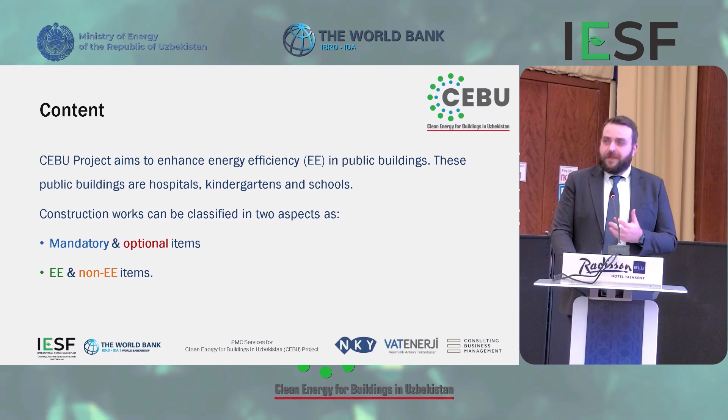So within our scope, we have buildings all over Uzbekistan, which are schools, kindergartens, and hospitals. And within these buildings, we have some mandatory works to be done and some optional ones, as well as energy efficiency related works and non-energy efficiency related works within our scope. So I will briefly explain first the mandatory ones, because these are going to be applied in every building within the scope of the CEBU project.

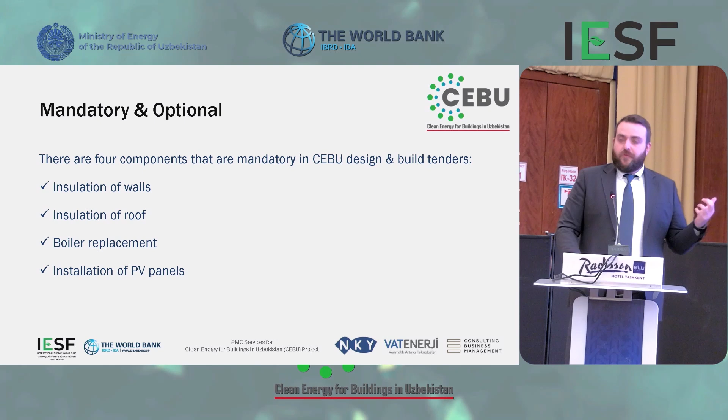So the first one is insulation of walls. When we insulate the walls, the building has better performance keeping the heat inside. So this is number one. Secondly, we have the roof insulation, because heated air mass elevates, and most of the elevated air mass goes out from the roof. So we should also insulate the roof. The third one is boiler replacement, because they are the biggest energy consumers in the building. So more efficient boilers will lead to energy savings. And lastly, as a renewable energy source, we install photovoltaic PV panels.

So starting with the insulation, I think all the construction companies here know what insulation is. I'm not here to teach or direct you about what has to be done within the project. I'm just willing to give some tips, or to give you a better understanding of what we expect from the implementation part. So in insulation, you know how it works. There is the wall of the building, then there is an insulation part, and then we cover it beautifully with plastering and paint.

So in the buildings we have visited, we mostly see brick walls, and they are pretty thick. We see either a double layer or two double layers of brick walls with an air gap in between, which is also used as insulant. But since these buildings are old and deteriorated over time, this air gap between the brick layers is not totally insulated. So either hot or cold air goes inside this air gap, and it's not perfectly working, let's say. So in insulation, think of the right-hand side as the external part of the building and the left-hand side as the internal part.

We prefer to have insulation from the external side of the walls because it's easier to do, easier to work on, and you can create good visuals, aesthetics for the building after doing the insulation. Considering that our buildings are relatively old, a visual update would look very good and create visibility for the works you are doing within the project. But this is not the only way.

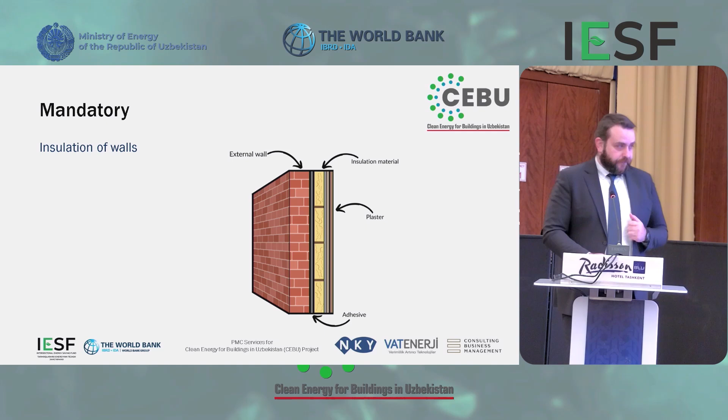As I said, secondly, we are going to insulate the roof structure, because in almost all of the buildings we have visited, the roof structure is not insulated, or it had been insulated, but over time, through lack of maintenance, the insulation is there but not really performing. So for this purpose, insulating the roof structure is mandatory.

In our project, as I said previously for insulation of the walls, we have to consider the transpiration within the building. If you have a non-breathing roof structure, like a solid concrete structure, it's going to keep moisture inside, and moisture is going to kill the structure slowly, especially the wooden parts.

So when you are going to work on the roof structure, you have to consider a few things. The wood you're using should be resistant to water, or it can be dipped into some chemicals to make it waterproof. You have to have a vapor barrier. That's another solution. A vapor barrier would keep the roof structure dry enough and save it from further deterioration.

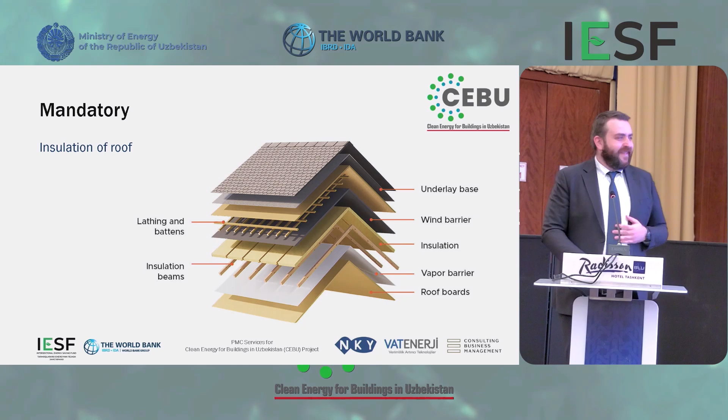When insulating the roof structure, we have a few options. It would depend on the roof structure we have within the buildings. The first one is using mineral wool, like rock wool or basalt wool, however you prefer. It will be your choice. This is the one that you can apply most easily.

But as I said, it depends on the current situation of the roof structure, because not everywhere do we have the height of a person where you can go inside easily and work. In some schools the height is maybe 60 to 80 centimeters, so it is not really easy to work in. But this is a good option, because in this option you insulate the roof structure from the top.

But also consider that in Uzbekistan, in most of the public buildings, between the roof and the roof slab there is usually a gap of 60 to 80 centimeters, which takes air inside in order to prevent transpiration, as I said. So in this case, insulating the roof from the top, from the roof structure, might not be the best option.

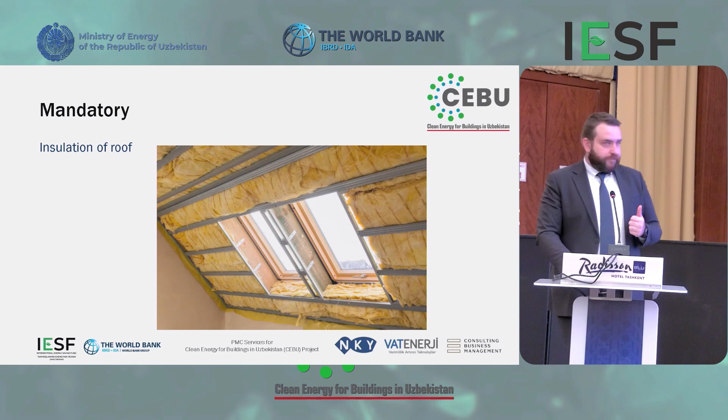So the second option is using polyurethane foam, which is very easy to apply. You don't need to install anything. Adequate workmanship is easy. You basically use a foam thrower, and you can implement this anywhere. It fills any gap, it expands, so it is good. This is our second option.

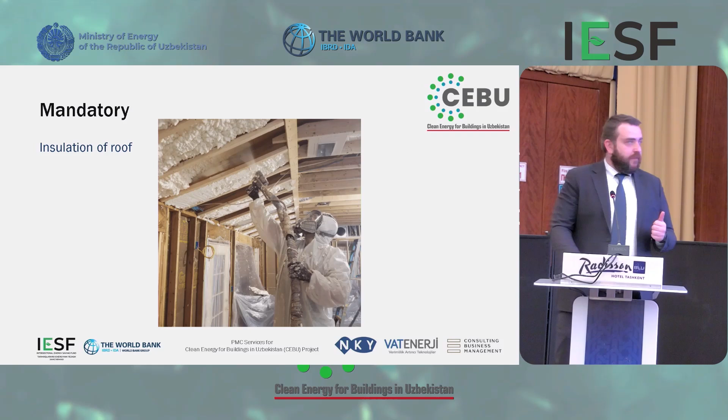And the third option is insulating the last slab of the building. You can put again mineral wools, like rock wool, basalt wool, glass wool, as you prefer, and insulate the last slab. So you protect the final slab of the building from the water, because you have the roof structure on top of it, and you can have the insulation above the slab. So it's going to insulate the building envelope, and you will be able to keep the heated air mass inside the building.

And also, the good side of mineral wool is it is a breathing material, so it will allow you to take fresh air inside and, how to say, let CO2 concentrated air outside. So it is a good option as well.

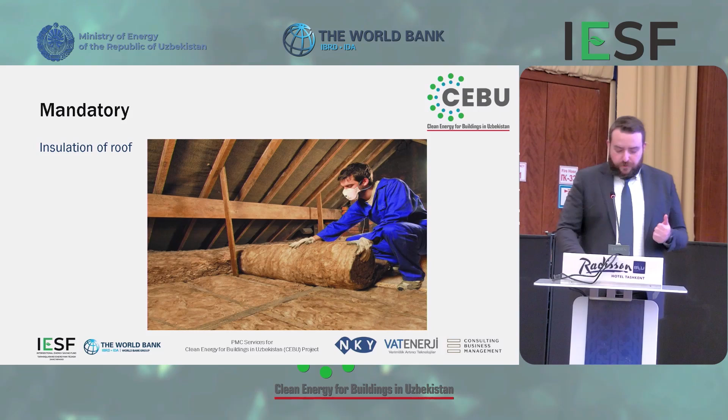In our tenders, I will explain in the session after lunch, we expect, as I said, efficiency, and we have some preconditions like maximum years of return, internal rate of return, payback period. So boilers are the most important actors in our project in terms of efficiency, because their payback period is short. They are relatively cheap compared to other items like insulation of walls or the roof. So boilers are very important. And these boilers have to change.

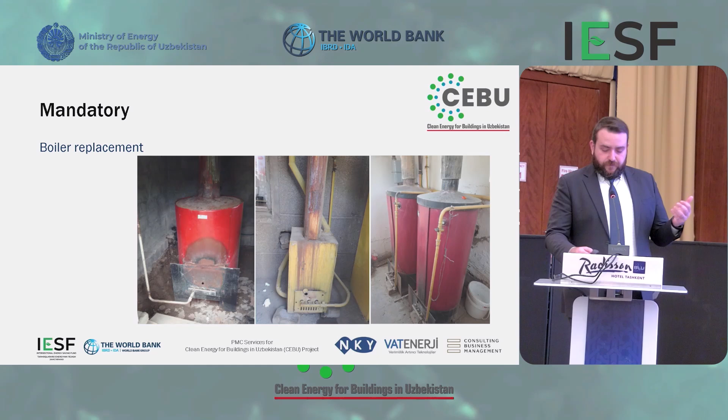While changing these boilers, we can think of it like this. They are very inefficient. If you burn the fuel, doesn't matter if it's gas or coal, whatever, I mean, we don't support coal, but natural gas, or any liquid fuel, or if you're using electricity to keep the boiler running, it is still inefficient. So we advise you to replace all these boilers with modern technology. For example, this is a wall-type condensing boiler working with natural gas, so it will increase your efficiency a lot. So once more, I would like to underline that the boiler is the most important actor in public buildings in terms of energy efficiency.

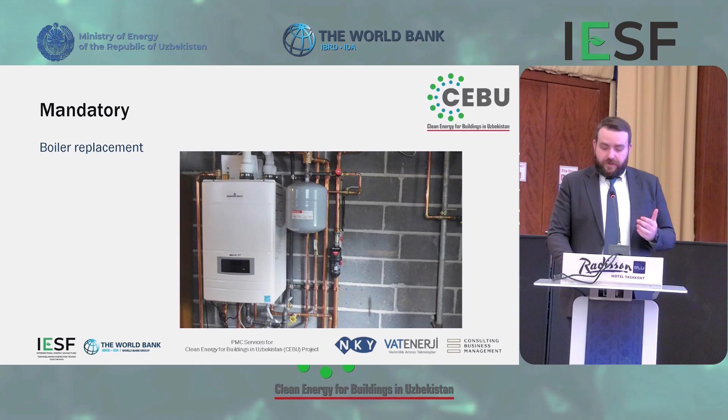And lastly, we have photovoltaic panels. So when we say PV panel, or in Uzbek quyosh panel, the first thing that comes to our mind is putting the panels on the rooftop. So this is the most common practice. When you go out, even in the coffee break, you will be able to see some PV panels all around. But this is not the only way to apply it, because what we see most often doesn't mean it's the only way or the most practical way. I will show you some examples.

So another way to apply PV panels is putting them on car parking canopies. So it works for two purposes. It creates shade for the cars, and it also generates energy. But in order to do this, you have to make sure that there are no trees around higher than the canopy, so it's not blocking the PV panels.

And the reason I'm showing you other applications of PV panels is because most of the buildings we are visiting are 2-3 story buildings. I don't mean the hospitals. Hospitals are big, but schools and kindergartens are mostly 2-story, maximum 3-story buildings. And there are trees around them which are higher than the building level. So the trees are sometimes blocking the roof of the building. So it would decrease your potential of having renewable energy from the solar panels. So car parking canopies is one option.

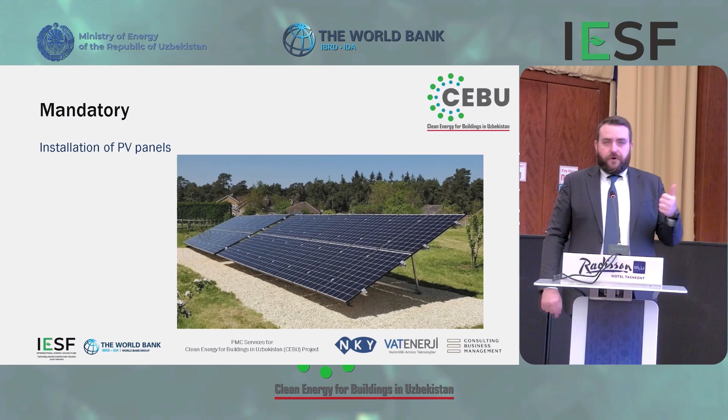So this is the easiest way to clean it, because it's on the ground, you can easily clean it. But when it is on the rooftop or in the car parking canopy, it is not very easy to clean, because you have to take extra measures for safety, or maybe you can use robots, but it would also bring you extra costs.

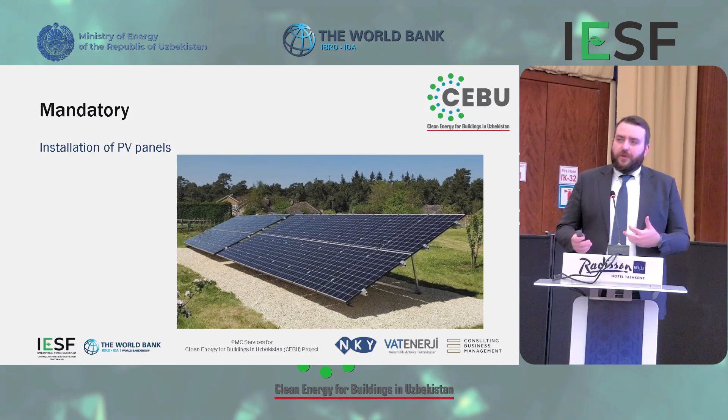And as I said, we have some optional measures. I will explain this from two aspects. When you are going to prepare your proposals, you will propose your own energy efficiency measures. You will design them. Within the bidding documents, we are giving you an exemplary table, as my team leader showed in the previous presentation.

You can follow this table, or you can create your own, because, as I will explain again after the lunch, in our project it's not going to be the cheapest bid winning the project, it's going to be the best engineering proposal that wins. So basically you can bid more expensive than anybody else, but have a better engineering design and still win the tender. We try to create the best value for money.

So when creating your own energy efficiency measures, you can consider optional items as well. For instance, in the buildings we have visited, the radiators are pretty old. So you can think of replacing the radiators with more efficient ones. I don't prefer to say the most technological, brand new ones, but more efficient ones, in order to increase efficiency and have more savings, and also to increase the comfort standards.

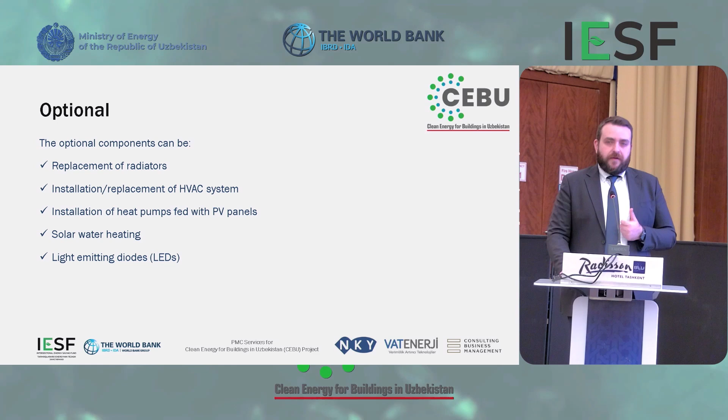You can also apply solar water heating, which is pretty much preferred in Uzbekistan. On most of the rooftops you see this solar water heating. This is not mandatory, this is optional, so it would decrease the energy consumption of domestic hot water systems within the buildings. And lastly, not really having so much effect on the energy consumption of the building, but on the comfort levels, you can use LED lighting to have some saving and increase the comfort measures of the building.

So, as I said, I mostly spoke about energy efficiency related items within the project because these are directly affecting the consumption of the buildings. But there are also some other works which are required or sometimes preferred, non-energy efficiency items that have to be done or should be done within our project. Let's say the floor you're working on is in a really bad condition. You should somehow replace the floor coating, or at least not replace, but rectify the damages.

Or let's say you're working in a school. Sometimes we see the roof structure is not perfectly covered. We see sometimes some holes in it. Or when you are installing PV panels, you can also accidentally create some holes, some gaps in the roof structure. So you also have to rectify these damages, because otherwise it has no meaning. It's not usable if there's a big hole in the rooftop but PV panels on top of it.

For the insulation of the walls, you will install the insulation material, and then you have to, as I said, cover it. So it requires plastering and paint, which, as I said before, also creates good visibility for the building you're working on.

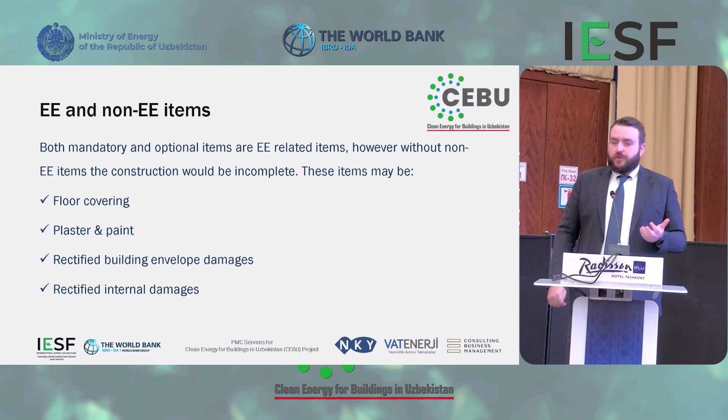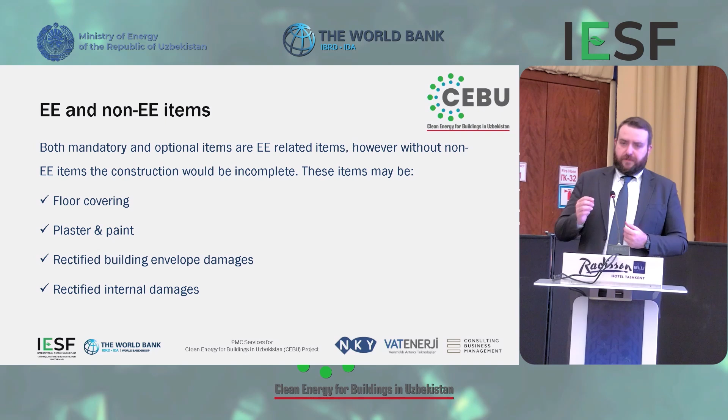Also, I would give some extra examples as well. In the schools, you will see there are sports halls, and they're poorly conditioned. There's a basketball court, but even the lines of the court are not visible. So you will be asked to rectify these kinds of damages, which are not big monetary items in the budget, very small, but create amazing visibility after your implementation. So this is going to be basically to your benefit, improving the brand value of your company or joint venture undertaking the implementation.

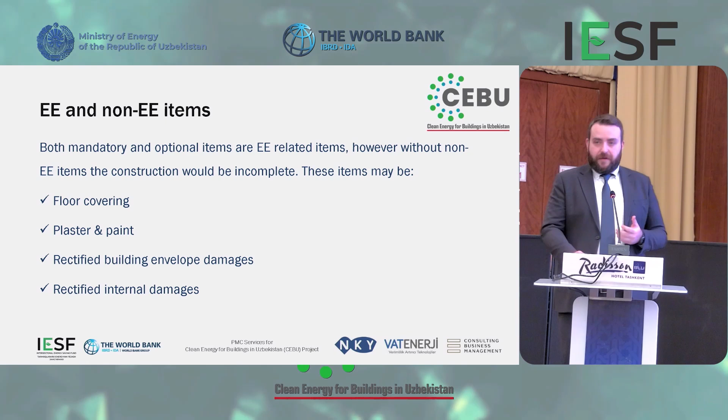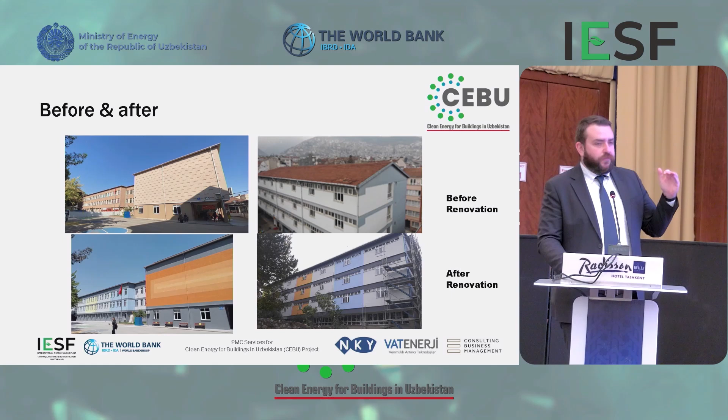And you also maybe realize one thing. What I mentioned previously, here they have trees. Even though the building is pretty long, you see there are trees around. So in this building, they didn't put PV panels on the rooftop because of the trees, which is not really visible here, but they preferred to put PV panels in a separate area, and they had to relocate some trees in order to increase the performance of the panels.

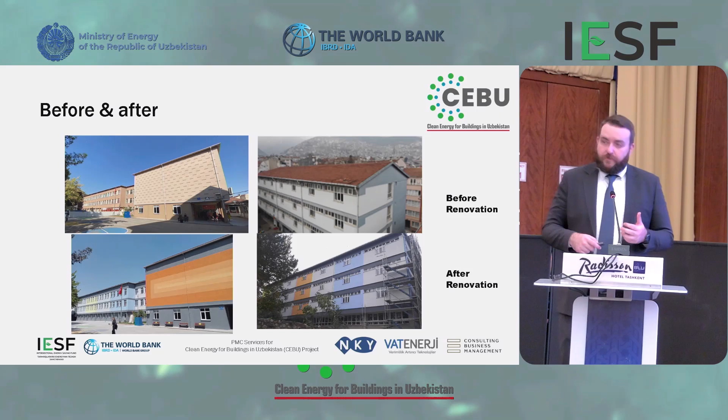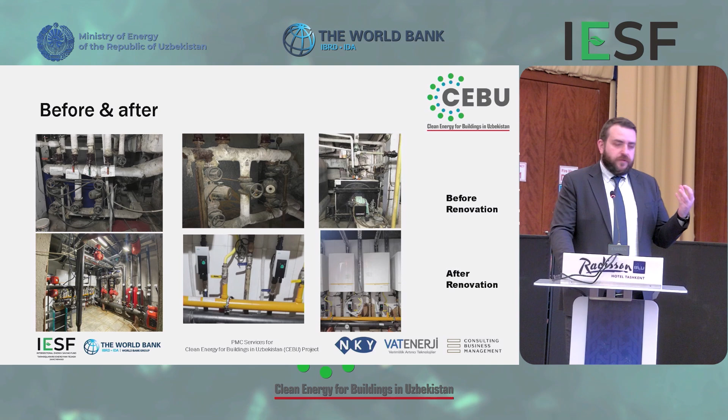Even after the renovation, in the picture on the left bottom side, you see the rust on the ground. They couldn't remove it. But after the renovation of the technical areas, the piping, equipment, and everything else, it is easier to conduct maintenance and also easier to see what the equipment is working for, which pipe has hot water, which pipe has cold water, where it is going, where it is coming from. There are some safety valves, some electronic automation equipment which makes it easier to use. Also, it gives an opportunity to exactly measure the energy consumption and water consumption of the building, so the building also starts to create data.

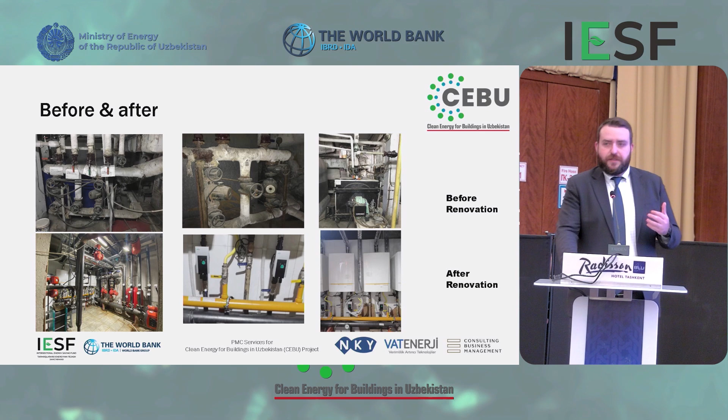And on the right bottom side, you see an old boiler, which is not so old actually, replaced by wall-type condensing boilers, which are way more effective, which is also what we suggest in our project. We also provide this in our proposed EEM tables.

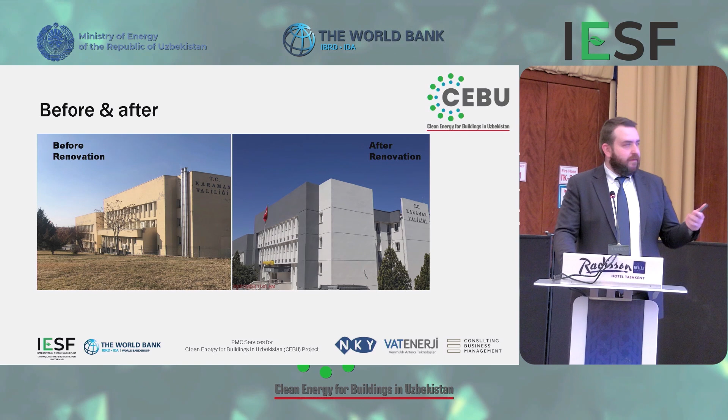So that's another facade renovation. Here it's basically putting insulation, putting new plaster and paint. On the left-hand side, you see it's yellow, it's deteriorated, and when it rains, sometimes the water from the roof structure doesn't always go through the waterways, but leaks from somewhere, goes on the facade and leaves a mark. In this building, they preferred the paint which cleans itself. So no matter if water leaks or if there is rain all the time, it's going to look perfectly clean, like new all the time. They did it because this is the governorship building in a city in Turkey.

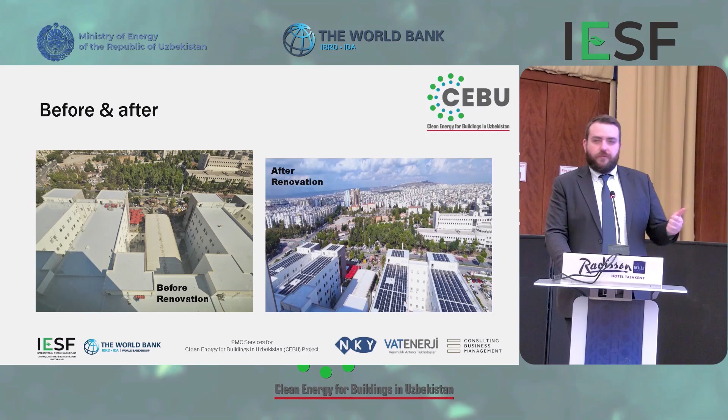So about the solar panels again, this is a hospital building and it has a huge empty rooftop. There is nothing. You see, there is not even equipment for cooling systems. So they use this area with PV panels, which are also easy to maintain and clean because the roof is flat. This is from Antalya, Turkey, so it rarely snows there. When it snows, it's like an event in the city. So they don't build roofs with a truss. Instead, they build flat roofs. So it's an easy example to put PV panels on a flat roof, easy to do maintenance, easy to clean. So that's another idea for you.

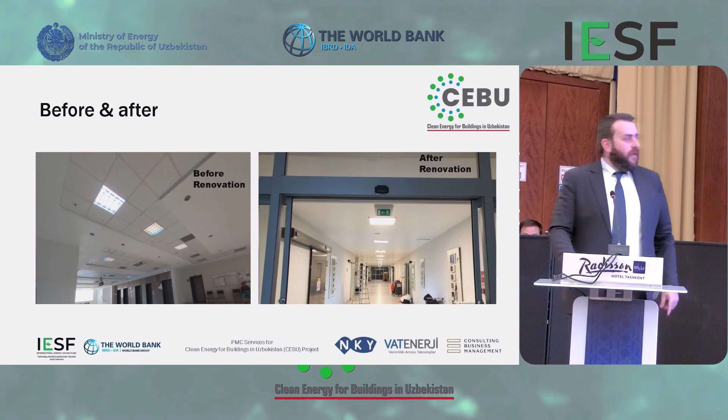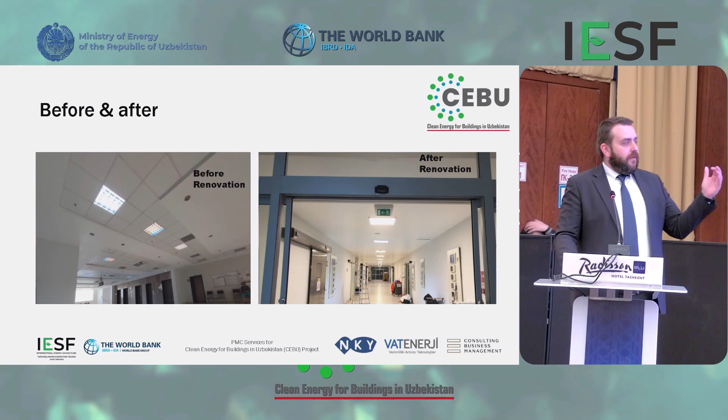So when they replace it with LED lights and do the illumination automation, or optimization, let's say, it is perfectly lighted. They put sunlight colors in the light, so it feels better. It increases the comfort standards. And considering this is a hospital, that is a very good solution in terms of lighting. Also, it provides not a big, but a small percentage of saving.